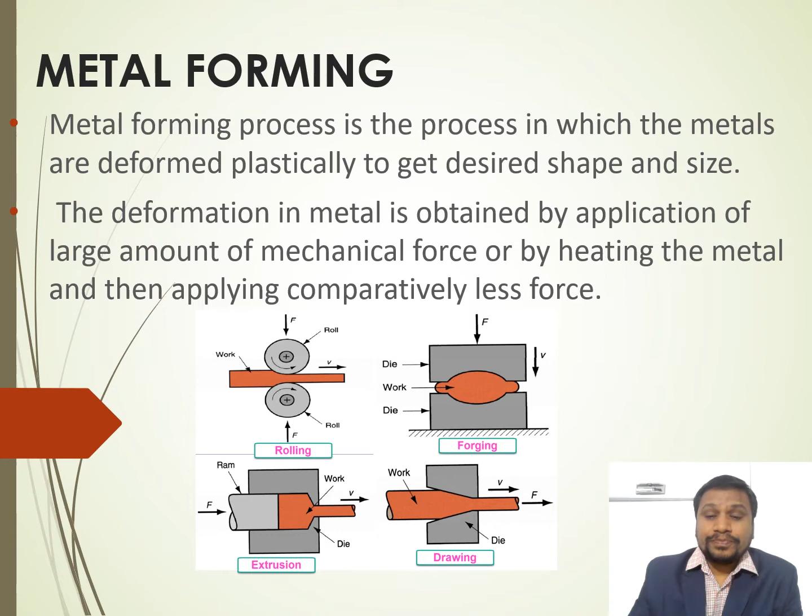In this slide there are different types of metal forming processes like rolling, forging, extrusion, drawing, etc. The next slide is what are the metal forming processes. Metal forming processes are rolling, extrusion, forging, deep drawing, etc.

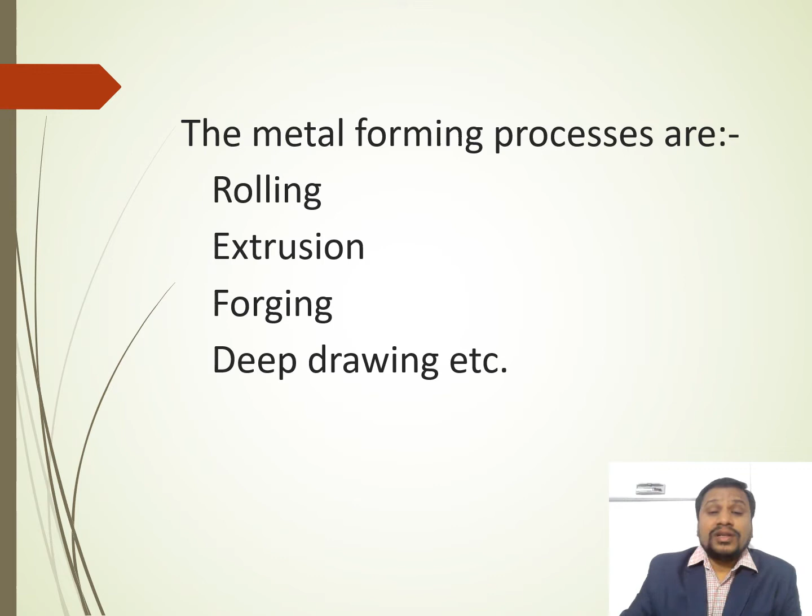The next slide is metal working process. What is metal working process? Metal forming process is basically categorized under metal working process. So what is metal working process? Metal working process is the process in which metals are formed or reshaped to get our requirements.

Metal working process is the process in which metals are formed and shaped to get our desired shape and size, according to our requirements. Basically, on the basis of heat applied, metal working processes are of two types: hot working process and cold working process. So what is hot working process and what is cold working process?

If the working temperature is above the recrystallization temperature of metal, then the process is known as hot working process. If the temperature is below the recrystallization temperature of metal, then the process is known as cold working process. So now there is a question: what is recrystallization temperature? What is recrystallization? A very important phenomenon.

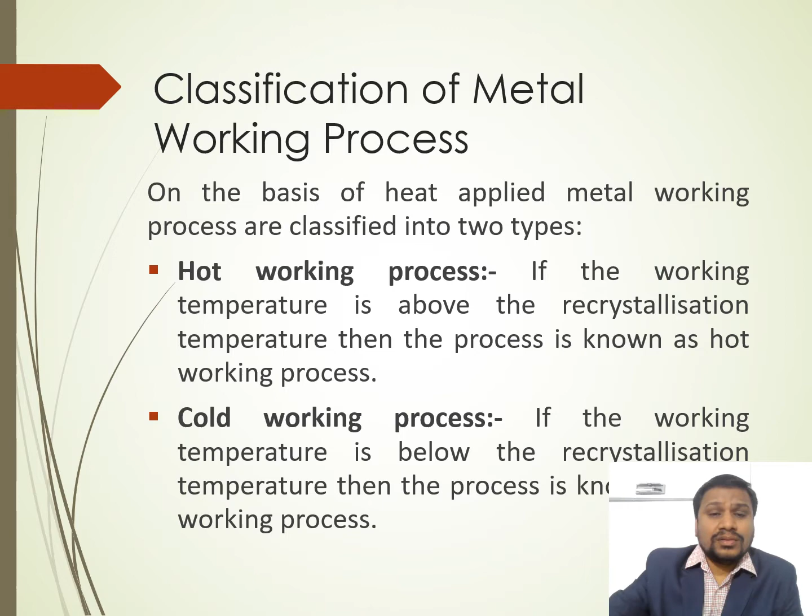Next we will discuss recrystallization. What is recrystallization? As we know, every metal is composed of solid atoms, ions or molecules arranged in a pattern of repetitive manner in 3 dimensions. That is known as a crystal.

There are different types of structures in crystal: BCC, body centered cubic, HCP, hexagonal close packed, and FCC, face centered cubic, etc. Then what is recrystallization? Recrystallization means formation of crystal again in the metal.

Recrystallization is the process in which the old crystal structures or grain structures are destroyed in the metal and new crystal structures or grain structures are formed. That is known as recrystallization, a very important phenomenon.

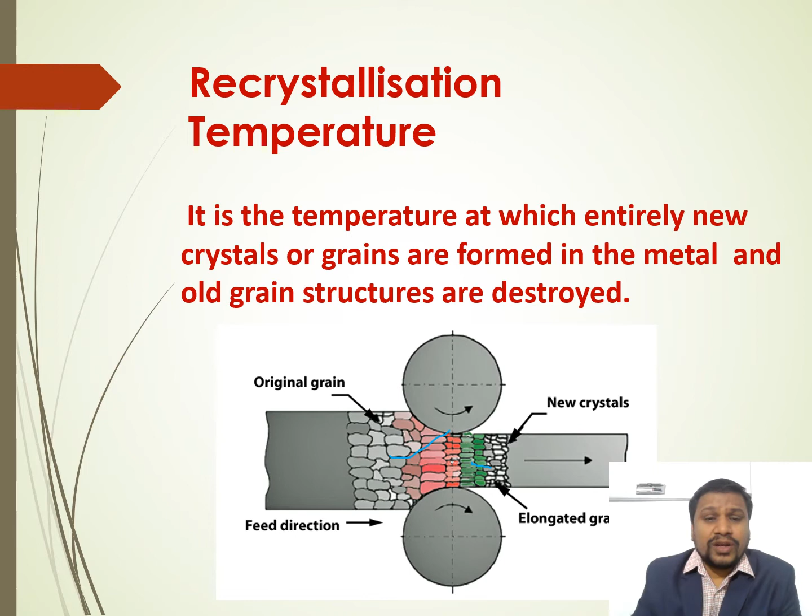Next we will discuss extrusion, the first metal forming process according to your syllabus. First we discuss extrusion with an example. You all use a toothpaste tube daily. When we use a toothpaste tube, we squeeze it from the bottom side, then the toothpaste comes out from the opening. It is not a metal extrusion process; it is an example of extrusion, toothpaste extrusion. With this example, I want to explain the extrusion process.

So when we squeeze the toothpaste tube from the bottom side, the toothpaste comes out from the opening. So it is extrusion of toothpaste. So what is extrusion? Something is to be extruded. What is the product?

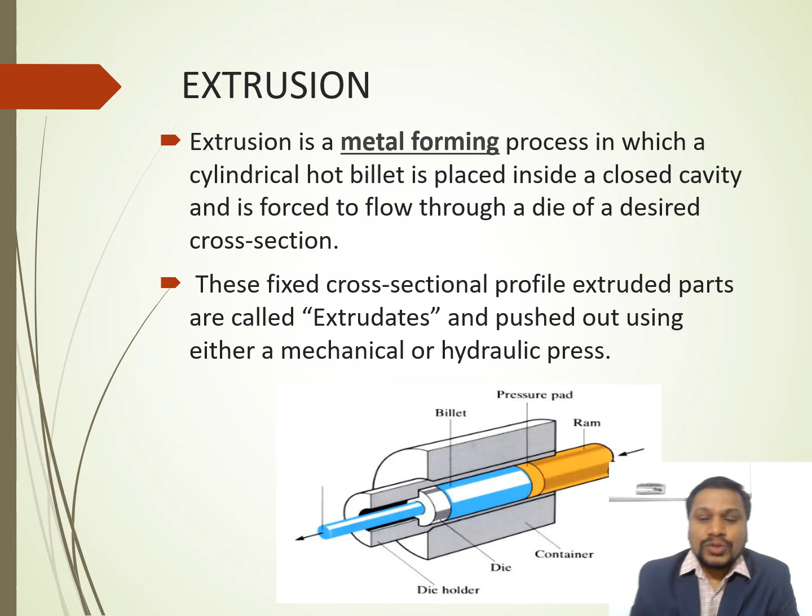Then what are the basic elements of extrusion? There are three basic elements of the extrusion process: first the container, second the ram, third the billet. So extrusion is a metal forming process in which hot metal is placed inside a closed container and is forced through a small opening called die of desired cross section. The next slide is classification of extrusion.

By the direction or by the movement of ram, extrusion process is divided into two types: direct extrusion or forward extrusion, and indirect extrusion or backward extrusion. According to operating temperature, extrusion processes are divided into two types: hot extrusion and cold extrusion. Then according to axis of the extrusion equipment, horizontal extrusion and vertical extrusion. Okay, so these are the broad classifications of extrusion.

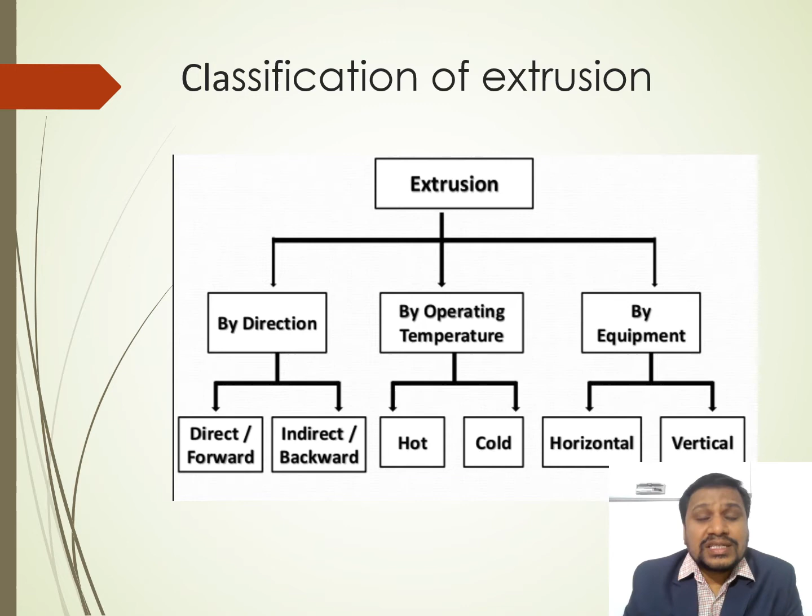Okay, so next, direct extrusion, or forward extrusion. What is direct extrusion? In direct extrusion, the flow of metal through the die is in the same direction as the movement of ram. It means the movement of ram is in the same direction as the movement of metal extruded. So here the movement of ram is in the same direction as the extrusion of metal.

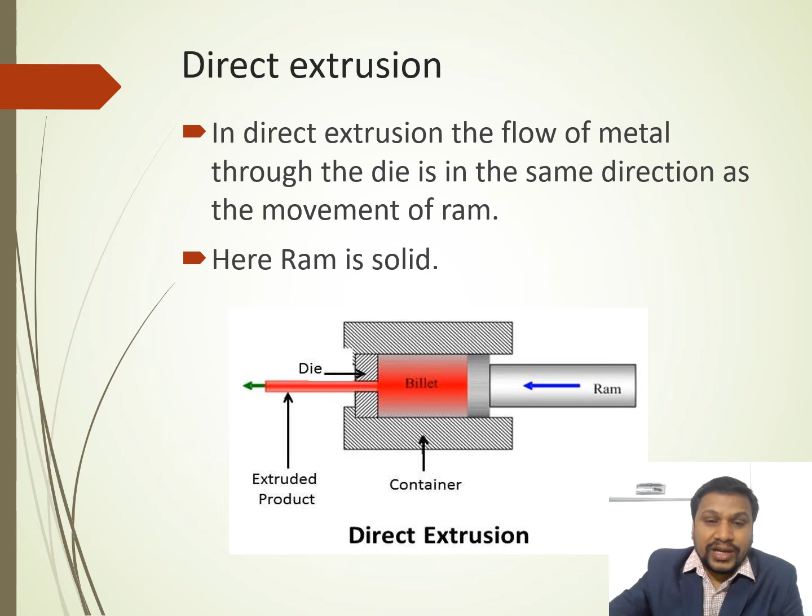Okay, so next slide, we will discuss the working principle. A hot billet is placed within the container that has a die at one end. A ram forces that hot billet through the die opening, producing the extruded product. Here the ram is solid in nature.

In case of indirect extrusion, it is just opposite of direct extrusion. In this type of extrusion, the flow of metal is in the opposite direction to the movement of ram. Here the ram used is hollow. Okay, so you can see the figure.

The hot metal is contained in a container, then the hollow ram is forced to that hot metal and the hot metal is allowed to flow through the hollow portion or the opening portion of the ram. The extrusion takes place through the hollow portion of that ram. So the ram used is hollow and the die is mounted over the bore of the ram. So just opposite of direct extrusion, here the ram is hollow.

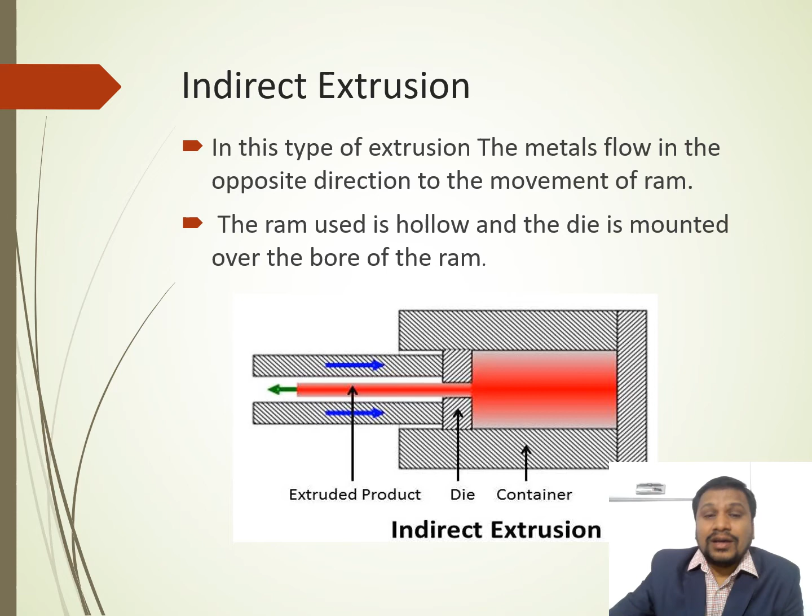Okay, and the metal flows through the annulus formed by the ram and the container. The metal flows around the periphery of the ram. Okay, so this is backward extrusion.

Okay, in some books it is written that indirect extrusion is also known as backward extrusion. But there is some difference between indirect extrusion and backward extrusion. In indirect extrusion, the diameter of the ram is the same as the bore of the container, but in case of backward extrusion, the ram is smaller in diameter than the bore of the container.

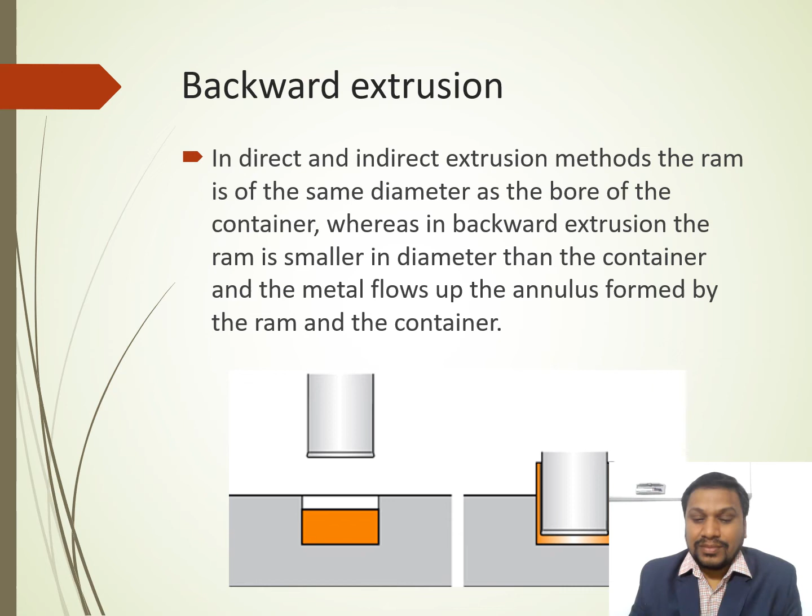Okay, so in next slide we will discuss impact extrusion. The name itself indicates there is some impact force applied. So in impact extrusion, the metal is placed in a die, and then the punch forces that metal.

Impact extrusion is an extrusion process in which a slug of cold metal is placed in a die cavity, and it is formed by the action of a rapidly moving punch. The metal is placed in a die, and the punch moves rapidly towards that die, completing the necessary forming operation.

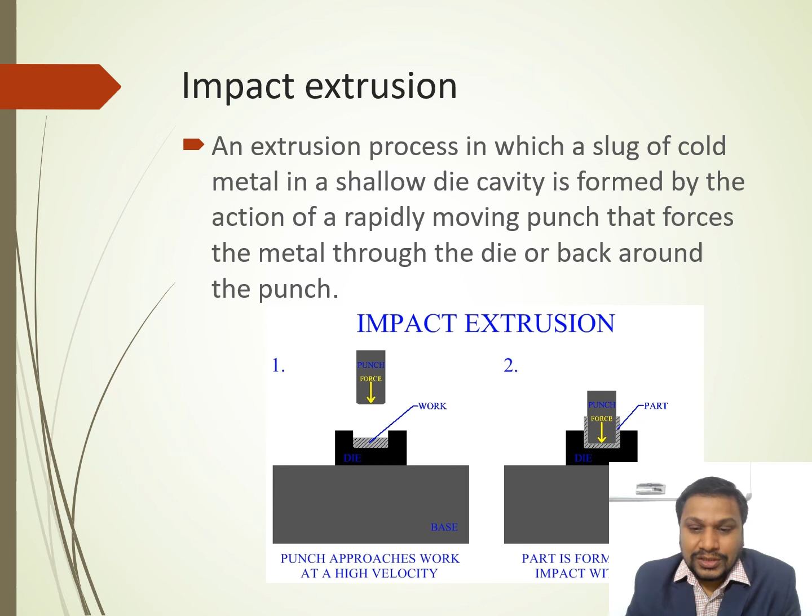Impact extrusion is used for manufacturing collapsible tubes, like shaving cream tubes, toothpaste tubes, and thin wall cans. It is also called cold extrusion because the impact extrusion process is conducted at room temperature. That's why it is called cold extrusion.

This cold extrusion or impact extrusion is limited to soft and ductile materials. Only soft and ductile materials are formed by this process, such as aluminum and its alloys, copper and its alloys, etc. Like indirect extrusion, the metal is extruded in the direction opposite to the punch movement. This is all about impact extrusion or cold extrusion.

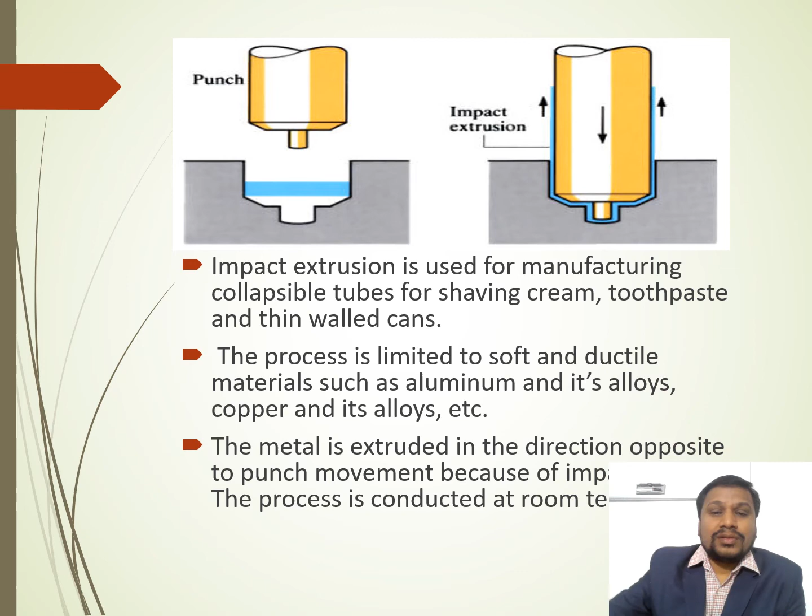Next metal forming process according to your syllabus is rolling. What is rolling? Rolling is a metal forming process in which hot metals are allowed to pass in between two revolving cylinders called rolls. As a result, the area of cross section of that metal is reduced and the length of that metal is increased.

Rolling is the process of compressing the metal by passing it between two revolving cylinders called rolls. As the metal is compressed, its cross-sectional area is reduced and its length is increased.

The starting material of rolling is the molded ingot, which is rolled into intermediate shapes like blooms, billets and slabs. These intermediate shapes are rolled further into plates, sheets, bars, structural shapes, and channel sections like I and L sections.

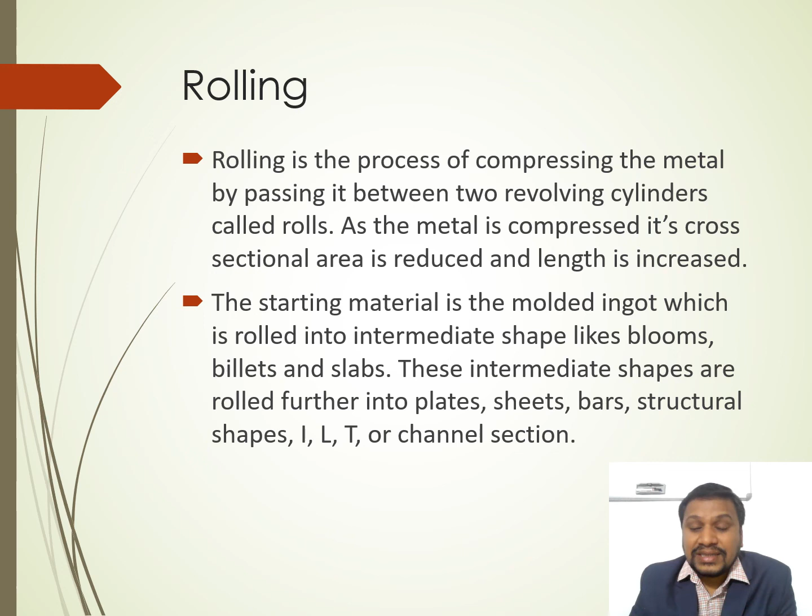What bloom, billet and slab are, and their dimensions, we will discuss later when we discuss hot rolling. But here, the starting material of rolling is the molded ingot, which is rolled into shapes like blooms, billets and slabs, then further rolled into plates, sheets, bars, structural shapes, I, L, channel sections, etc.

This is the working principle of rolling. The hot metal is allowed to pass between two revolving cylinders called rolls, which rotate in opposite directions. As a result, the area of cross section of the metal is reduced and its length is increased.

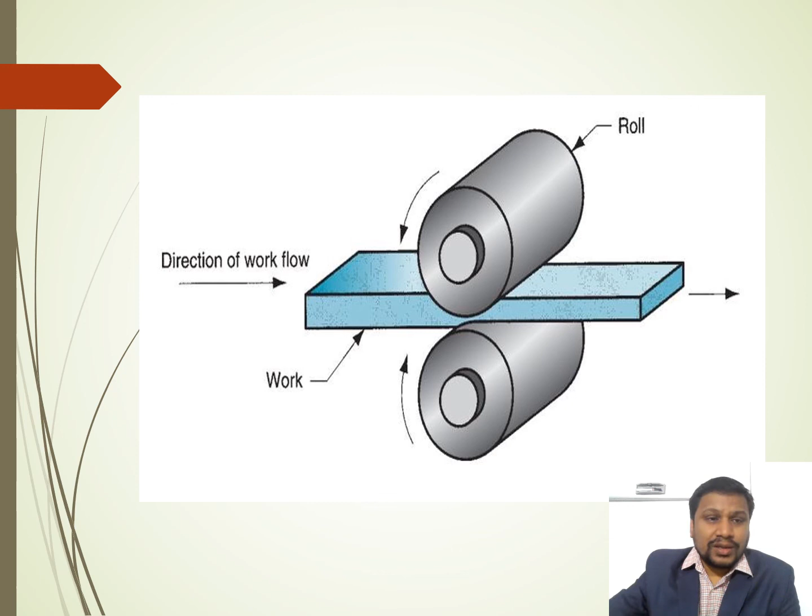The working principle of rolling consists of passing the metal between two rollers which grip the hot plate and so reduce it in size. After each pass, the rollers are brought closer together and the metal is passed through until the required reduction in its section has been attained.